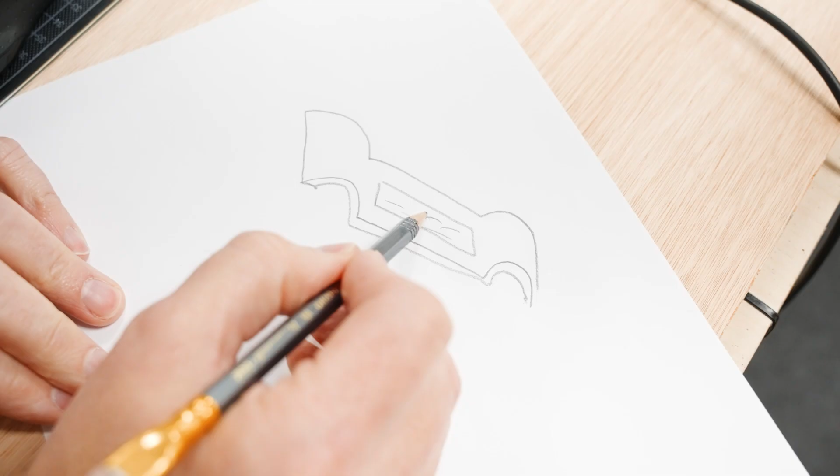So after I had that idea in my head, I thought, well, let me just sketch this out, so you get a good sense of what I would like this to look like. First of all, it would be an angle like this with a bit of a handle on it, then the tray, and then the other handle on the other end like this. A space in the center for some texture, and then maybe some text along that as well. That seemed pretty achievable with the molding toolpath.

So I have an instance of VCarve Desktop here with a job already set up, and we'll just sort of review that job setup. So it's a double-sided job, like I had talked about.

This width and height and thickness is about what I think we're gonna need for a decent size serving tray, and the thickness is about what I think we're gonna need in order to create some decent, useful handles on this. So that's where those numbers came from, again, just off the top of my head at the moment.

When it comes to our zero position, what we're gonna do is, when I do the first side, I'm gonna be zeroing off the top of my material. Then when I flip it over, I'm gonna zero my Z off of the bed of my machine, or my spoil board. I think for this job that will actually help me out a little bit, but you can set this up as you like depending on how you're going to cut yours.

The datum, as we said, the bottom left, we're going to flip bottom to top, which I like to do. It makes it easier for me to remember. I always flip bottom to top unless there's some reason why I can't. So I go with that.

Modeling resolution, we won't be creating any 3D content here, it's going to be all based on the molding toolpath. So there won't be any 3D content, but in my case, my computer can handle a very high modeling resolution, so I go ahead and use that anyway, and we'll click OK.

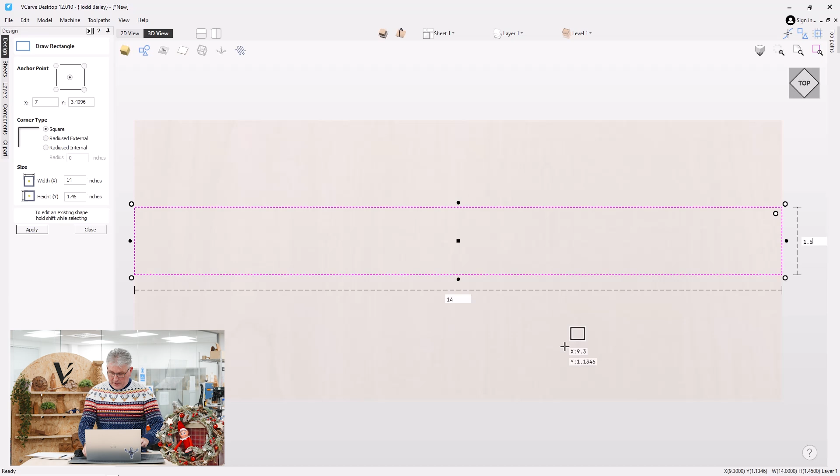To start off with this, we're going to sort of visualize the edge of our piece of material. So I'm going to draw a rectangle, and I can do that in the 3D view. That's going to stretch across the middle of my job from one side to the other. It's 14 inches, as you see here. I can press tab on my keyboard and change the thickness to be 1.5, and then press enter.

So that's the thickness I think the edge of this board is going to be. Now I can use this to draw the cross section, or the edge of my serving tray that I want to do. In this case, I'm just going to draw the top and the bottom profile of the two molding toolpaths I'm going to use to create this.

So let's draw a circle to start with. We'll just draw a circle here somewhere. That looks pretty good. We'll close that down, and we're just going to drag it and snap it to the side, and then we'll snap it to the top of our shape here. That looks good.

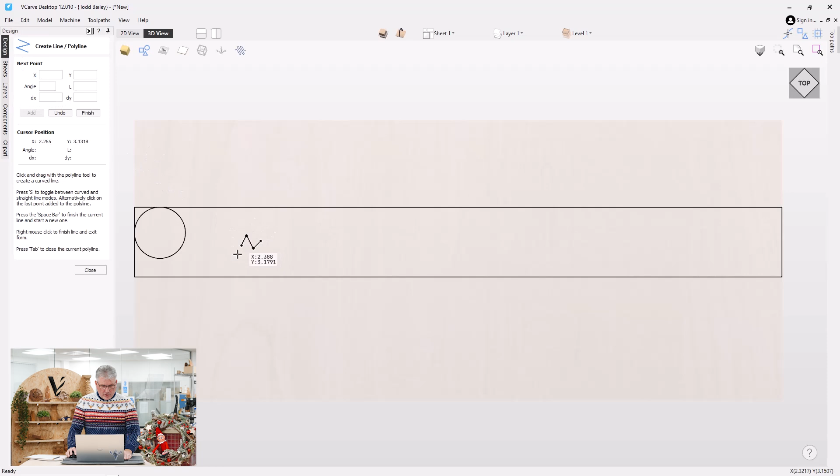And then we can just draw in a line across here that'll indicate the top of the flat area of my serving tray. Press escape. Now let's tile our views, and we'll zoom in to remove some of the parts of this circle.

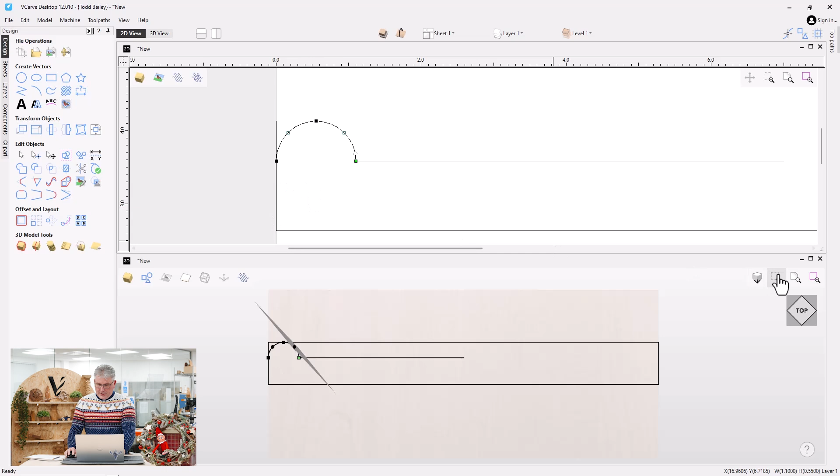In node mode, I'm just hovering over these curves, these arcs. I can press D and D, and now I have the part that I need left over. I'll maximize that so we can see it better. That looks pretty good. We'll select these two vectors, right click, and join those together, then move the endpoint so that finishes up there.

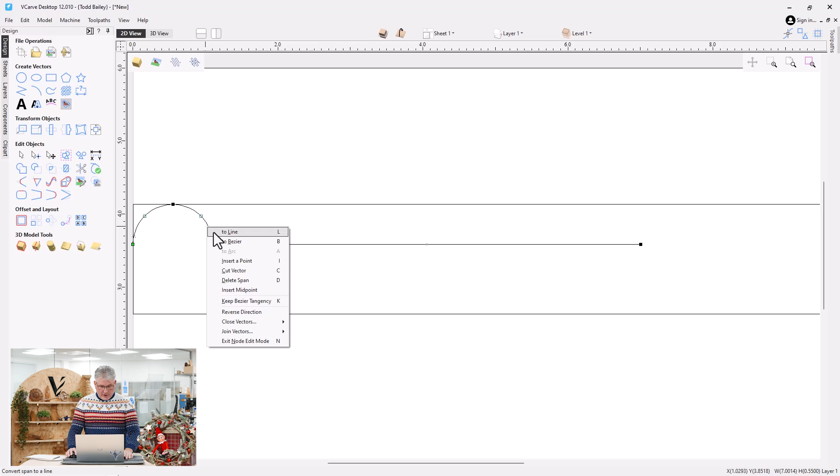Let's go into node mode. Now this is an arc right now, and I'd like to turn this into a Bezier, because that way I can shape this a bit better. So let's right click on that and say to Bezier. I can grab this one little node, and using my cursor keys pull it out a length that I like. I'd like less of a sharp point at the bottom, so I can grab that control handle and move it down a bit to somewhere that looks okay. Yeah, that looks all right.

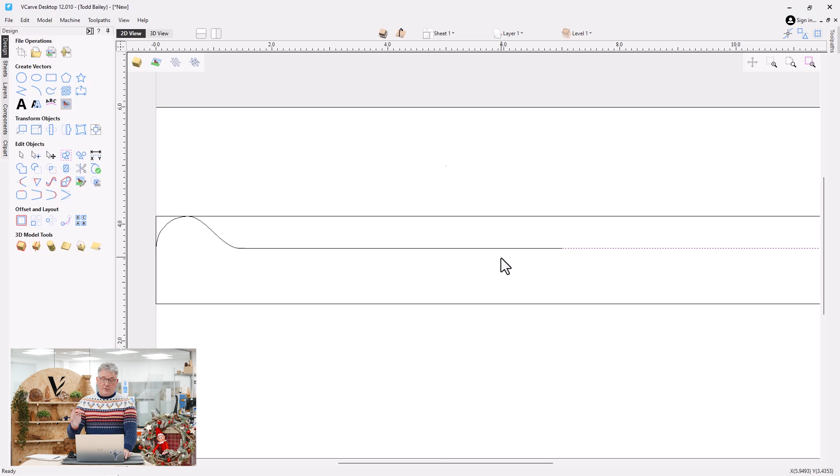Now we'll take this half of my surface of my serving tray, and hold down Control, Shift, and H. Control means copy, Shift means across one of our planes, and H is horizontally. So we're copying it across the horizontal plane of our job, and you'll see that's what happened here. If I zoom out a bit, you'll see that it's actually the right end.

Hold down my Shift key or right click, and we'll say Join, and move our endpoints. And there we have the first bit of our tray. That looks pretty good. What I'd like to do though is make this a little bit more scoopy looking at the end.

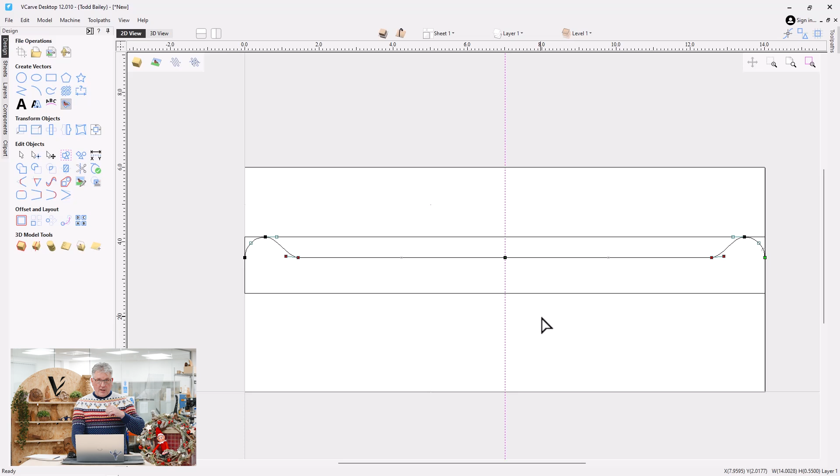So let's go into node mode, and if I press H on my keyboard, you'll see I have this line down the middle. If I select this set of control points and node, and also select this one, I can mirror the movement. So I'm moving the nodes on my left-hand side, and if I do that, you'll see they're mirroring to the right. And there we go, I like that shape much better.

That looks great. The next thing I need to do is create the profile for the bottom of this serving tray. So to do that, I'm going to go to my offset tool. The way an offset tool works along a single vector is pretend you're driving your car down the vector. If I want to offset it towards the left, I choose inward and left. If I want to go up or to the right, I'd choose the other option.

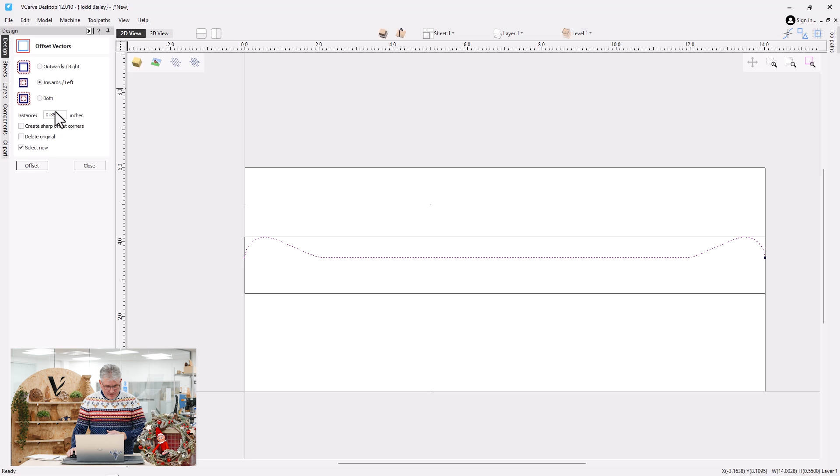Let's make this maybe a little bit more than this, let's make it 0.5 of an inch. Okay, we'll go inwards, we'll offset that. That looks okay, you'll see I got sort of a handle going here. Let's undo that and just make sure we get a decent shape. So let's put it back to 0.35 again, and we'll offset that. There we go, that looks a little bit better.

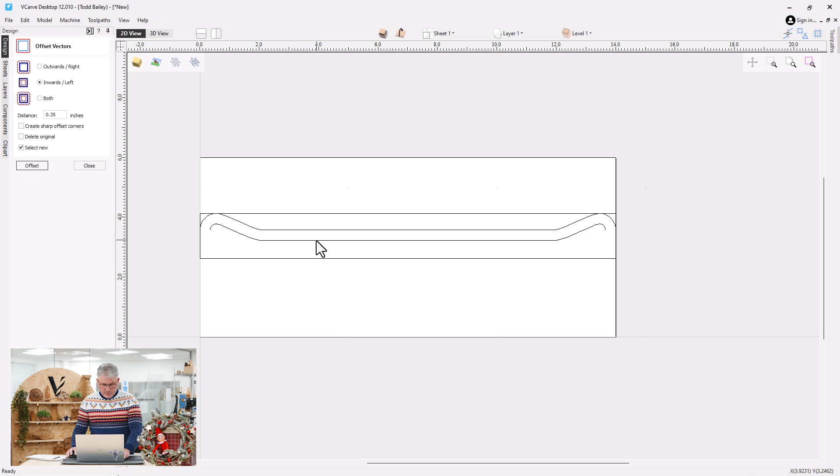Great. Now what we're going to do is leave it there where it is. We just need to make sure that—actually, no, we're going to grab these two vectors and stretch them. Just for the sake of showing you how this works, I'm going to make it look a little funny.

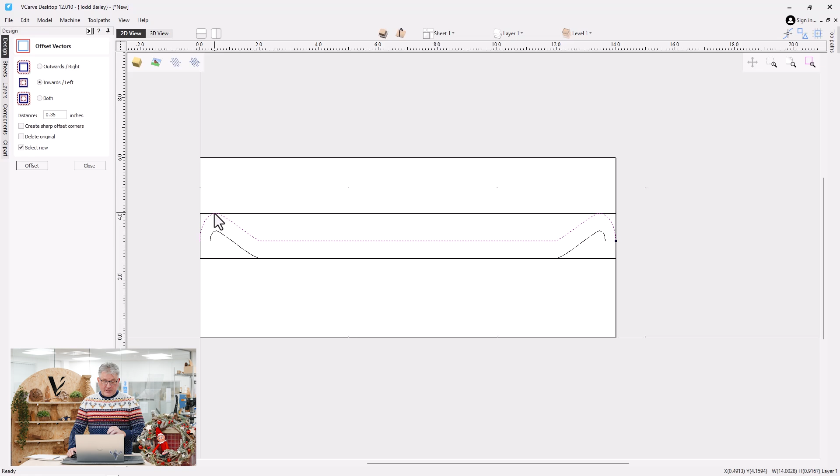That's because when we do our molding toolpath, it takes into consideration the topmost point of your vector. So this vector here on the top side will actually be at the very top of our material. When we flip it over, this will be at the very top of our material. You'll see in my final design that this looks a little bit different, but this is kind of the idea. The fact that it's a little bit thicker here in the middle doesn't matter for this demonstration.

This is solely just to show you how this works. So let's close this down and select those, and we'll move this up here out of the way. That looks great.

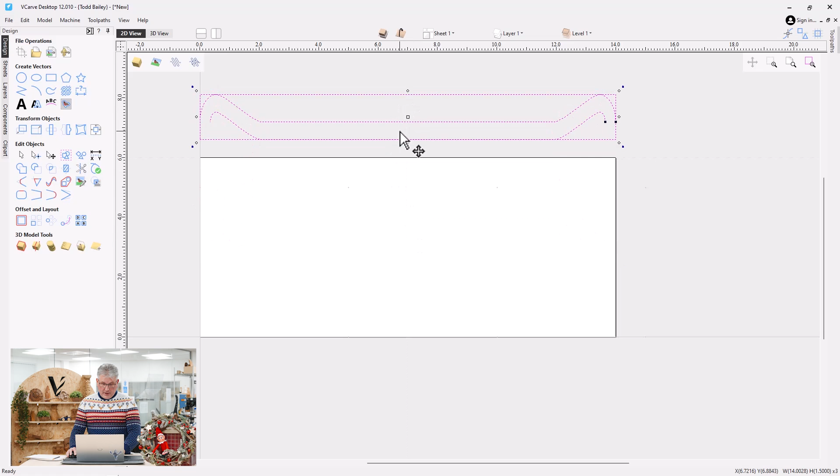Now we're going to need a couple drive rails, one for this upper vector and one for the bottom vector. The upper vector is really easy, we just need to go ahead and draw in a line from the top to the bottom.

Press escape. Now the next one we're going to need to use a guideline for, just to make our life a bit easier. Just go into our pick tool and we'll grab a guideline. We'll draw another line here and pop it down to there, and press escape.

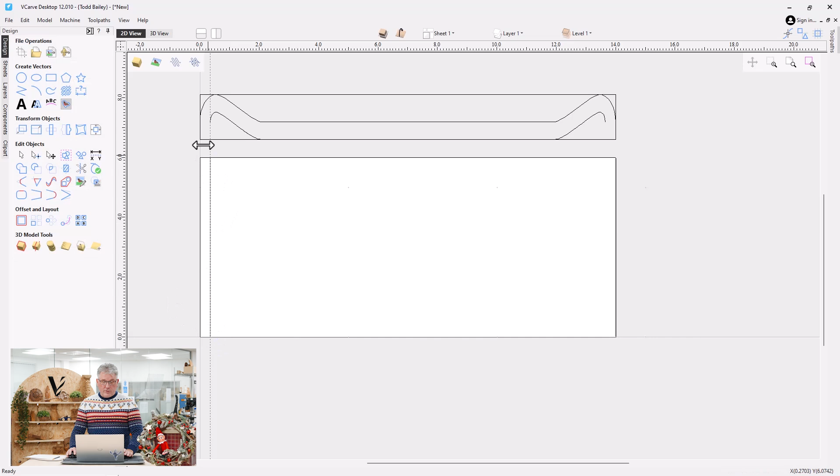And now we have two vectors, so we have two drive rails and two cross sections. Now to make our life a bit easier, I'm going to select this cross section and that drive rail, and we'll right click.

Oh, that's because I'm hovering over top of my guideline. If I right click on the actual vector, then I can move that to the other side so it's not on this side. Now let's go ahead and look at the actual molding toolpath.

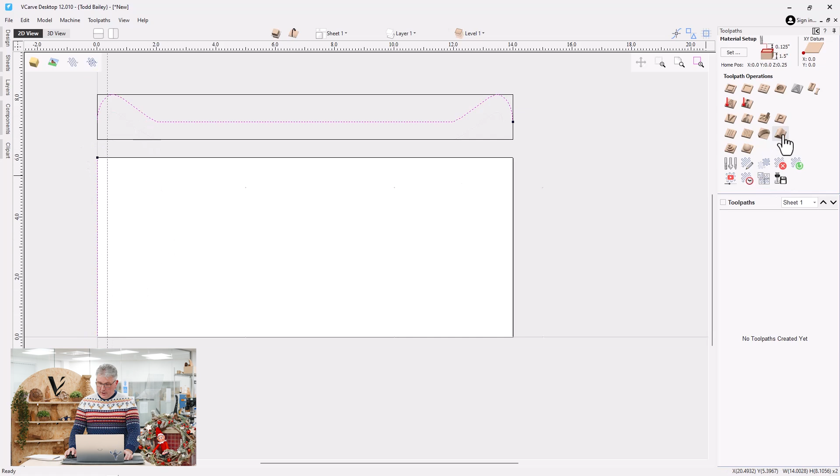So let's jump over here. To use the molding toolpath, first I need to select a drive rail and then also a cross section. If you want to know more about the molding toolpath, I highly suggest you watch our video on how to use the molding toolpath, where we'll get into all of this stuff really in depth.

So if I confuse you a little bit here or you get lost, that's okay, because we've got a great video to support this. As you can see, the actual toolpath is going to be at the top of my material, which makes a lot of sense.

I'm going to use a ball nose to do my finishing toolpath with. It's going to give a nice finish to the top of this. I'm going to vary my step over, so that as the molding toolpath goes up and down different curves, it's going to be nice and smooth because it's going to vary that step over.

I'm going to skip the flat regions with this ball nose because I'm going to go ahead and use my clearance tool to get rid of that material that's in the flat areas, since it's a flat bit on that, so I can go ahead and use that to do that work with.

And you can see I've got machine flat regions here. I'm going to leave a little bit of material behind in the areas that the ball nose is going to get to, so that it has some material to remove, and that's going to be 0.1 of an inch. It's a lot like our finishing toolpath when you do a 3D toolpath.

And that all looks great. We're going to use automatic boundary offset, which means it's going to extend the vectors out to the left and the right of that cross section just a little bit, whatever it thinks is correct, so that we get right to the bottom of those shapes.

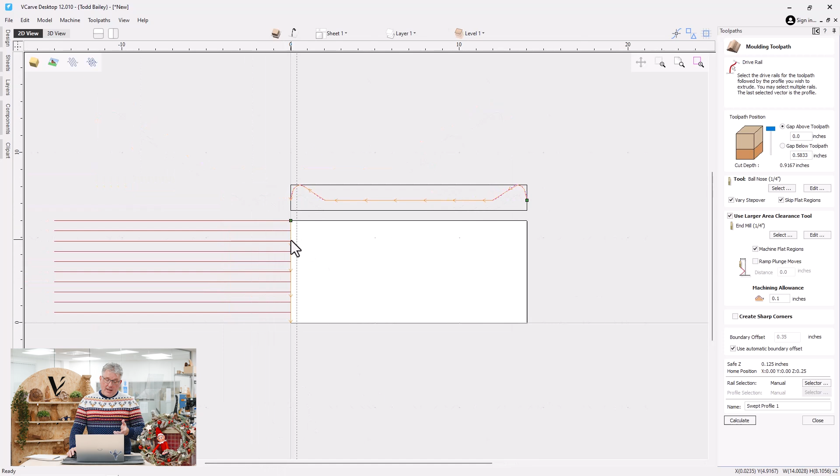And that's all set up perfectly, except if you take a look in the actual 2D view here, you're going to see that right now we're going to be creating the molding toolpath off the wrong side of this drive rail. So if I right click on that drive rail, I can reverse the direction and it will flip over into my job where it belongs.

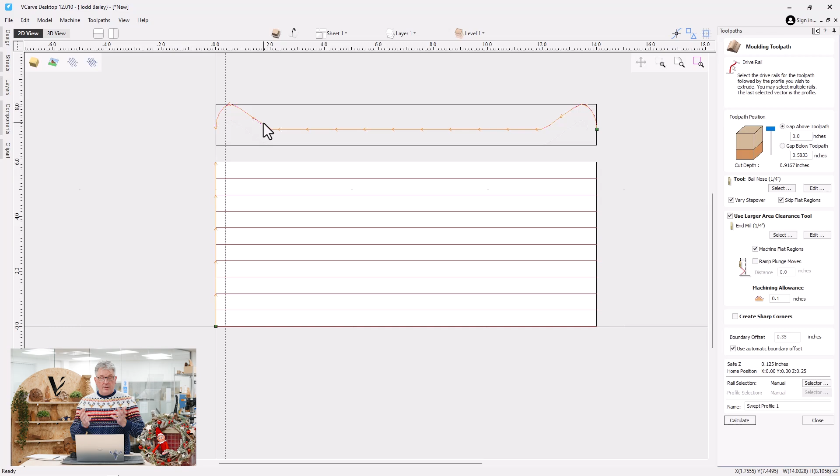Now with the molding toolpath, what we're going to do is run our tool up and down here based on this profile, which is going to give us a really fast toolpath to cut without having to do any 3D modeling. So let's calculate that.

And we'll quickly go ahead and preview that. You'll see what we're going to get here. That looks really good. So let's preview that visible toolpath.

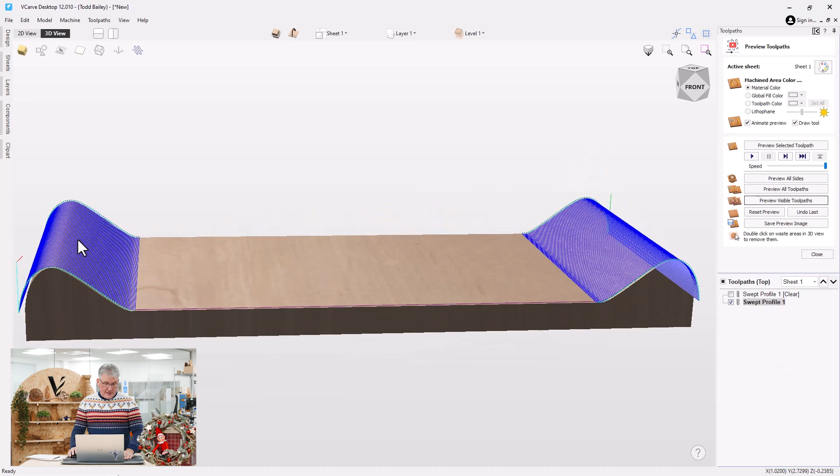And you'll see that there we're going in and clearing out all that extra material that we don't want, along with cutting that flat area on the top of my tray right down. And you'll see that the finishing or the sweep profile will actually go in and clean up these edges here and give us a nice smooth finish.

So that looks really good there. Let's pop over to the other side and do exactly the same. We'll go back to our 2D view, select this drive rail, hold down shift, and grab this cross section. Like I mentioned before, the molding toolpath will take the highest point on this vector and have it at the surface of our material, so that's exactly what I want to have happen here.

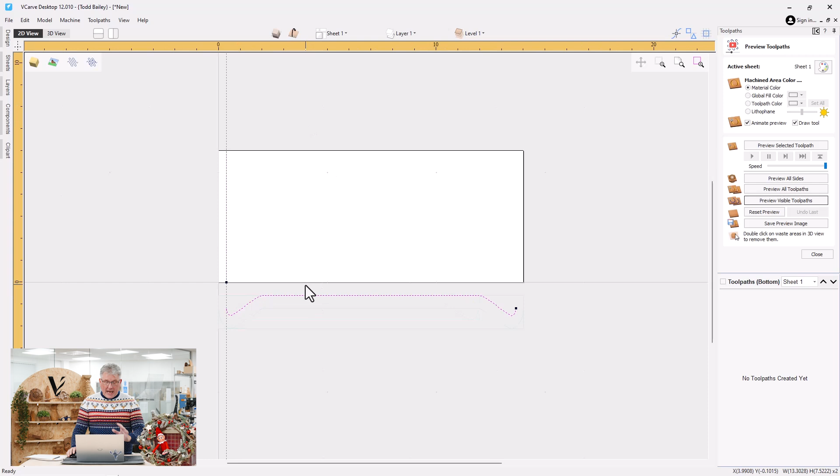Close this down, we'll create another molding toolpath. All the settings are going to be exactly the same, nothing's going to change, and we'll calculate that. Then we can preview that visible toolpath and have a look at what we get in the end. And that's what we're going to have, which is exactly right.

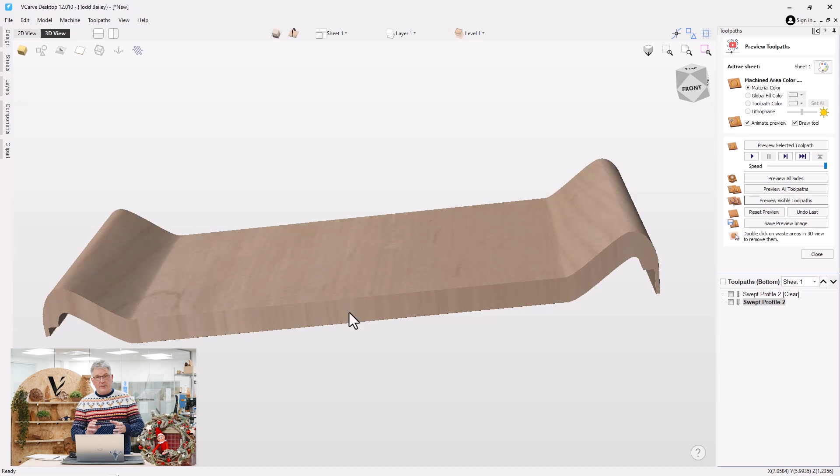Don't worry about these end bits, we can get rid of those later. But you'll see that the whole theory behind using the molding toolpath on a two-sided part to create a tray does work out exactly as you see it here.

Now let's go ahead and take a look at the finished file that I'm going to use to go ahead and cut this serving tray with. Okay, I've gone ahead now and opened up the file, and we're looking at one of the sheets. Now this file contains actually 3 different sheets.

So let's just take a second and look at the vectors at the top here, and they're the ones that are going to help me explain how I'm going to make a blank up for this job. Now I looked around the labs and I didn't have a piece of material that I thought was going to be thick enough for this project.

So what I decided to do was use these 2 pieces of material here. I've got a piece of maple here, and I can use this for the actual tray part of the job. Then I've got this other material, which I'm not quite sure what kind of wood that is. It's quite red looking, but I could use this to make 2 sort of raised handle areas that I could then carve away to shape to make a nice looking tray.

So that's sort of what you see at the top here. We've got this bottom rectangle here, which is that piece of maple, and then we have these 2 end bits here that would be the red material sort of pocketed into the maple. I thought that might give it a nice smooth look once I was done kind of shaping it.

Now when I was showing this project off to Rebecca to see what she thought, she was a little concerned that maybe just gluing these into the pockets wasn't going to be enough support to hold this together. So using some dowels might be a nice option, so I went down that road and we inserted in some dowels here.

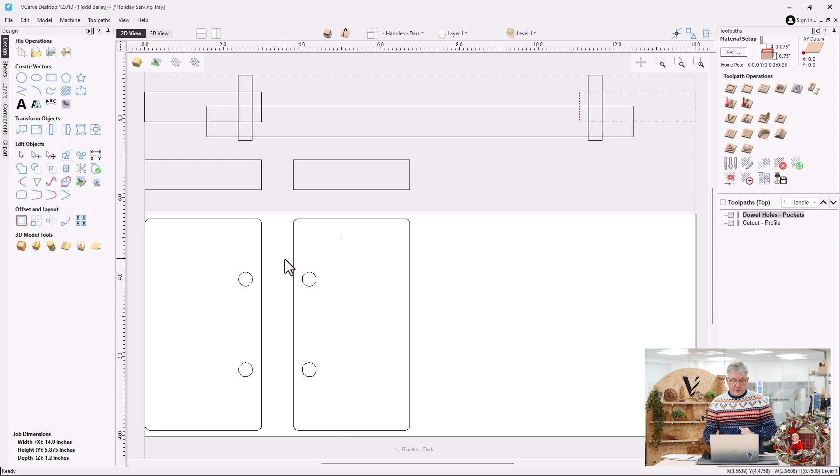And I'm going to pocket down this distance right here. So when I go to do that, I just use the measuring tool, and I can go ahead and measure the distance between that point there and this point down there. And it tells me that it's about 0.375 of an inch. So that's how deep I'm going to go down in my pocket.

Now, when I'm all done creating this blank, it's going to be important that I measure it, because this may not be accurate to what it actually cuts like on the CNC machine.

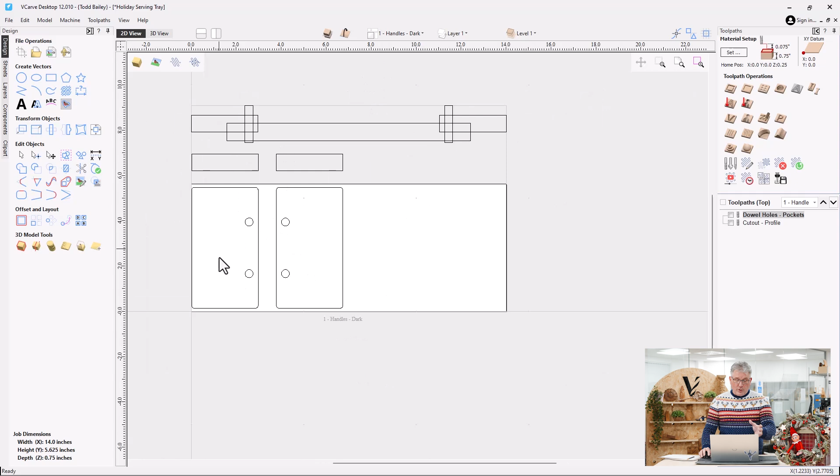So once I have those handles cut, I can go ahead now and think about what to do about the actual pockets. So I've got another sheet here, and this sheet shows where the pockets are going to be on the maple piece. And if you look at my tooling over here, see that I got the pockets.

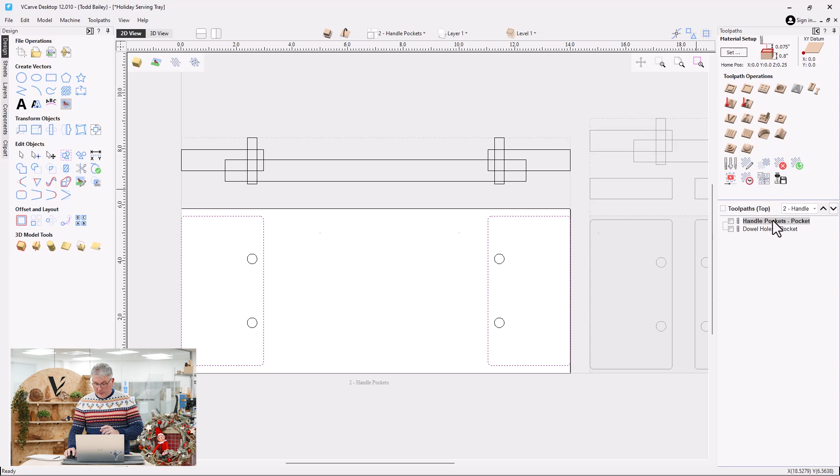And they're going to go down 0.3987, which is a little bit more accurate measurement than what I did there just quickly. And that way I can glue in. One thing I do want to point out about those pockets is that I used a pocket allowance, that way I can be sure that the handles would fit nicely into those pockets and me not have to hammer them in.

Now, I was a little bit unsure of how I was going to glue those in and clamp them in place.

So we'll kind of see how that worked out in the end. Now that I have all that done, I can go over and cut that on the CNC machine. Full disclosure, because there needed to be a glue up here and there's going to be some wet glue, I've already done this part of the job already. So let's take a look at how it cut on the CNC machine.

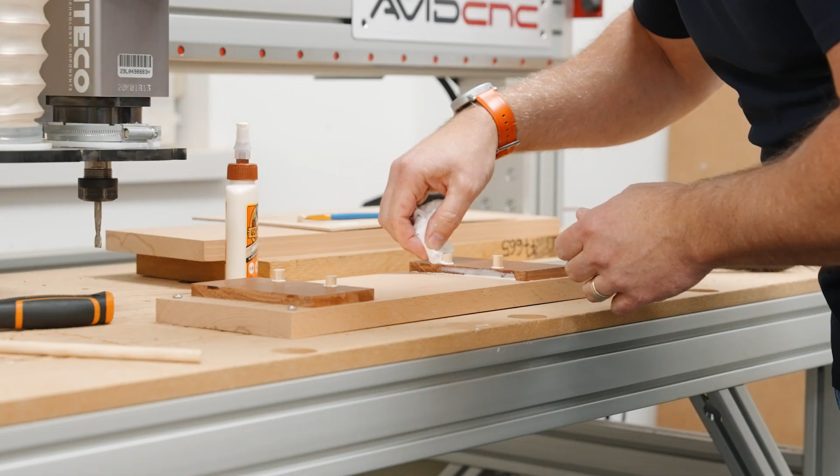Okay, now that you've seen how I've done all of that work, I need to go over today and cut off the tops of those dowels because they're sticking out quite proud from the handle of the material. So I've got this flush saw. We're just going to go ahead and cut those off right now.

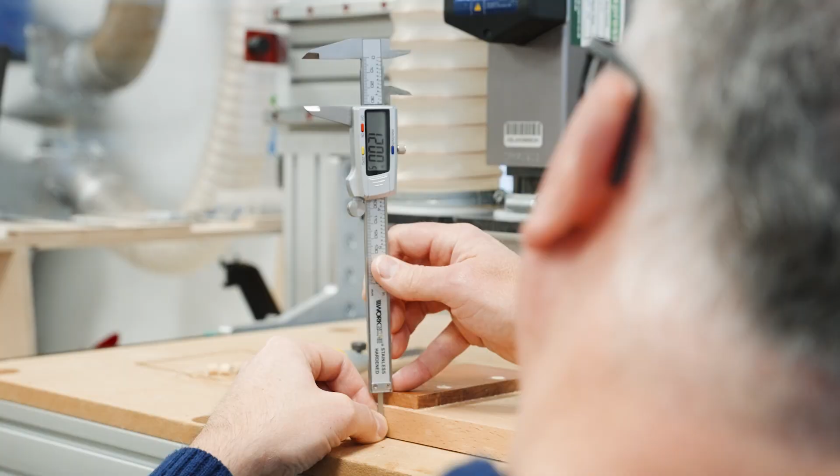Okay, now that those are cut off, I can now get a measurement of the proper thickness of my material that we're going to use on the final sheet in our actual project. So I'm going to use the calipers to do that with, and we're just going to get a rough measurement, something that's pretty close, I hope. Okay, perfect. Got that? Now let's go ahead and look at that file.

Okay, now that we know the thickness of that blank, we can go ahead and modify the final sheet to make sure that the material thickness is correct. So if I go up to my sheets here for a second and show the tray sheet, and we'll zoom out and have a look at that. We're gonna take a look at, and close down that toolpath.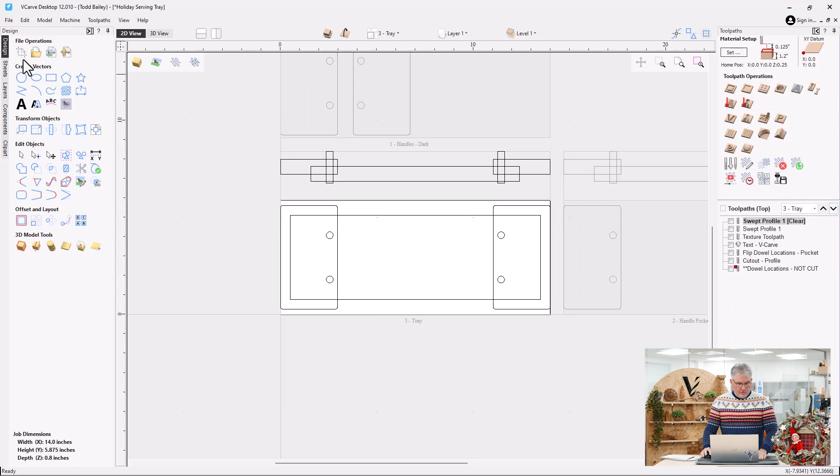We're gonna go over to our job setup and make sure the thickness of that material for that sheet is correct. So you just saw me click on job setup and that was wrong. I need to actually go to my sheets because this is a sheet issue. I want to make sure that this sheet, not the rest of them, is set up to be the right thickness. So let's go to our tray and go down to edit. You'll see that I've already gone ahead and changed that to be 1.2 of an inch thick.

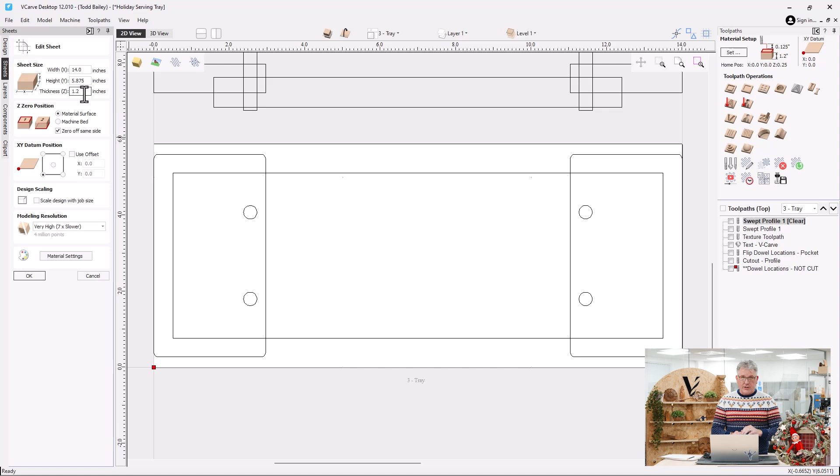So that's perfect, and we can go ahead now and look at the tooling that I'm gonna do for the rest of this job. So let's cancel out of that. Now again, we're gonna take a look at this. You'll see up top, I've left the blank drawing so that I could really be sure what was gonna happen. I've got now this rectangle here in the middle, which is the actual finished size of the tray.

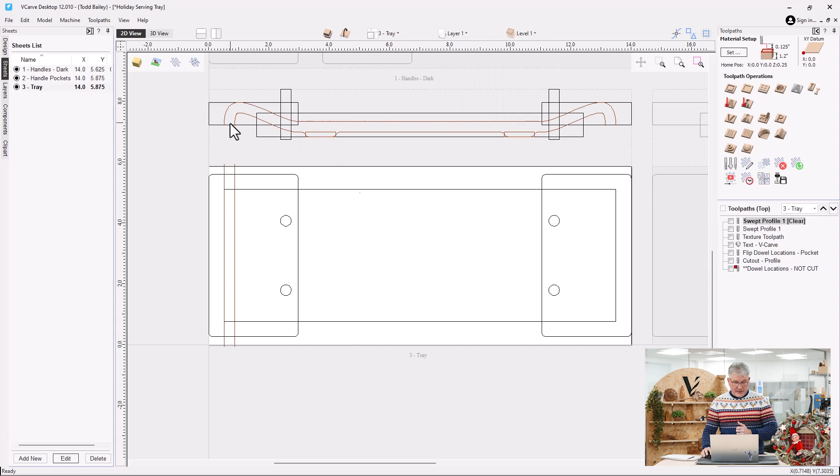Now what I want to do is design the actual molding toolpath. So here we have it right there, and you'll see that the molding toolpath fits perfectly inside of that blank. That was my idea in the end, to draw this to scale with inside this blank. So again, the top of these is going to be at the top of my material, and the bottom of the legs, the top of the legs, will be on the top of the bottom side of my material. And this distance here will be reasonably accurate.

Now, because this was drawn up before I actually knew the thickness of my blank, it's not going to be quite as accurate as it should be, but it should be pretty close. And you'll see we have our drive rails set up for our molding toolpath. So that looks really good. I'm really quite happy with that.

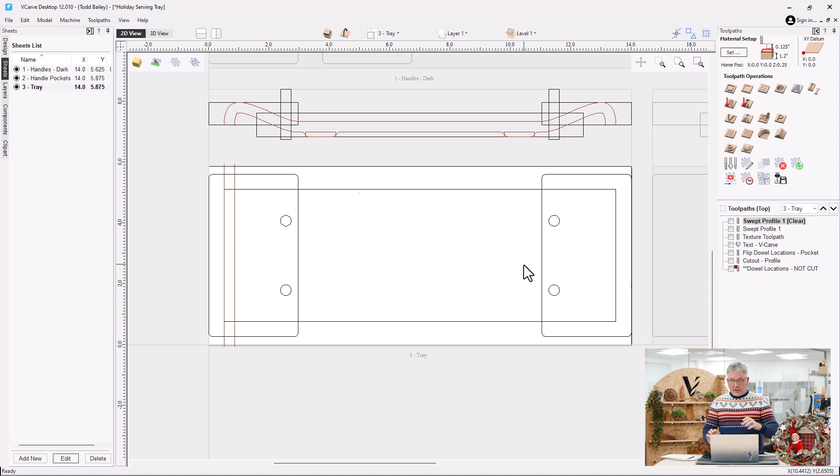The next thing I want to think about is to create a... actually, first let's just preview those toolpaths on this side to make it look great. So let's reset our preview here and preview those visible toolpaths on this side. That way we'll get an idea of how this is going to look.

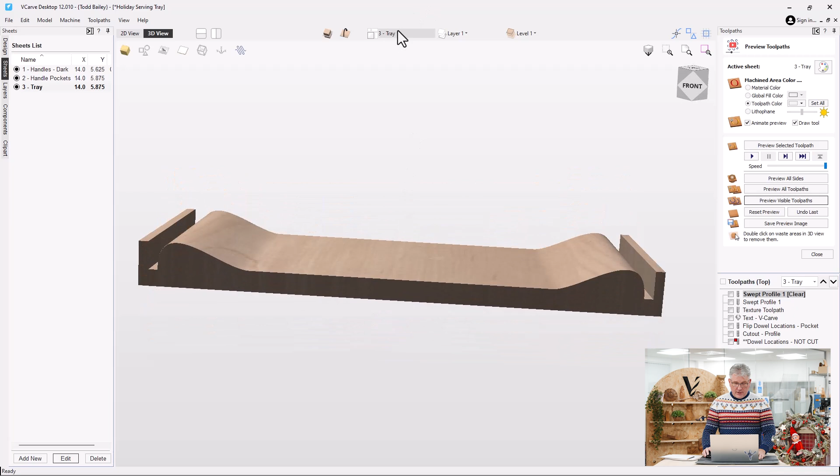Now keep in mind that the software doesn't know that I've created this blank, so it's treating it as one solid thing, which isn't the case. So we flip over to the other side and we're going to take a look at those two swept profiles. We'll preview that visible toolpath.

When we're all done with this, we'll see that we have a tray. There's no cutout pass or anything like that yet, but you'll see that we're getting the shape of our actual board here - hopefully what we'll see when we're all done cutting it.

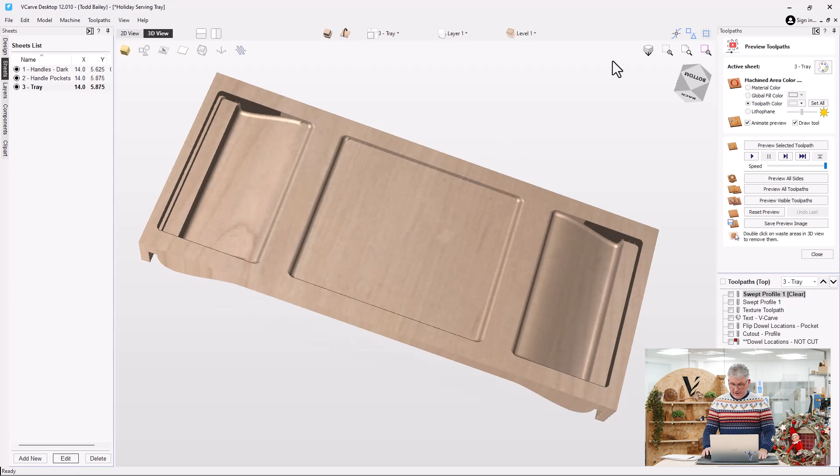So let's go back over to our other side again and look at the top of our job. Let's go back to our 2D view for a second, so we can do this in the 3D view too. We can turn on some of the other layers - we have our text layer.

So I'm going to add in some text into my job. You'll see that my text is going to be along the top and the bottom of my tray, and of course this is highly customizable text.

Right now I've got this set up for a holiday celebration - that could be Thanksgiving, it could be Christmas, it could be anything. You could also customize this maybe for a wedding, or maybe just for Thanksgiving with 'thankful' on it, or 'family' or something like that. So you can think about how you might reuse this file for all kinds of different things. That's kind of nice.

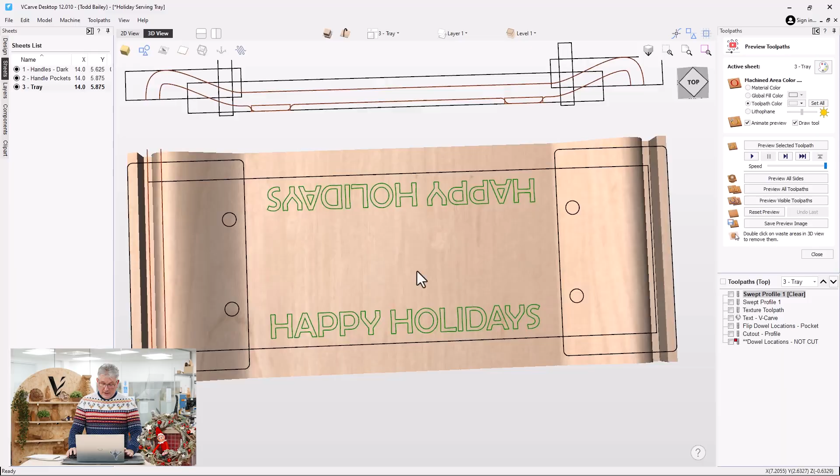That's really easy - that's just a really simple V-carve toolpath, and we can take a look at that if you'd like to. We'll just preview that toolpath, and we have a nice looking V-carving of some text there.

Now the next thing I want to show you how to do is to add in some texture. So I have this texture area that's going to be in the middle of my screen - that's the actual blue box that's here.

Now if you've never used the texture area toolpath, I really suggest you have a little bit of fun with this. I could have put texture all over this if I wanted to, or at least in the flat areas, because there isn't any 3D model - I can't project it onto a 3D model. This is the molding toolpath after all. But I certainly could have gone ahead and done any of the flat areas, maybe even ran it up a little bit onto the handle, just to kind of blend it in. But I chose just to do it in this rectangle here.

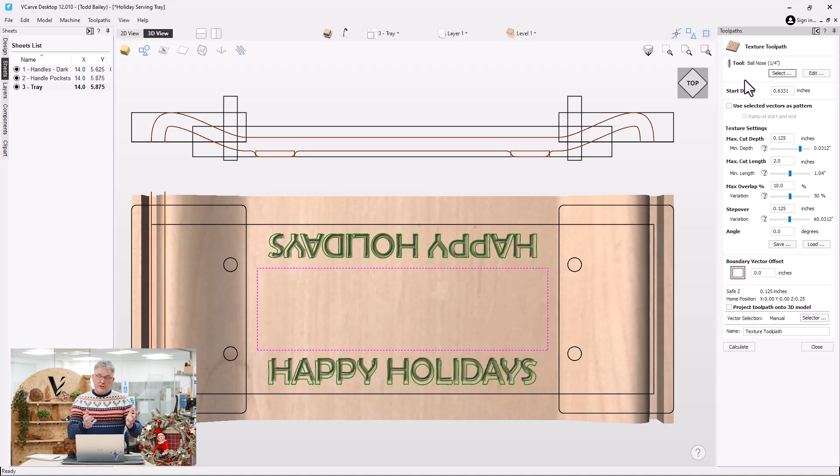So if I look at my texture area toolpath, it looks pretty daunting, but it's really not in the end. We have a great video on how to use the texture toolpath, one you might want to watch if you want to get a little bit more into this, but it is quite a useful toolpath to create textures with.

First of all, it's going to ask us for what tool we'd like to use, so I'm going to use that 1/4 inch ball nose. I'm not going to use a selected vector pattern - I'm just going to fill this rectangle with sort of a random or semi-random texture.

So I'm going to start off with my cut depth, which is going to be the max - I'm going to let it go down about 1/8 of an inch, with a little bit of randomness in there too, so it'll vary that distance just a little bit. My cut length, the maximum cut length, is going to be about 2 inches, and again I'm going to put a little bit of randomness in there so it ends up varying just slightly.

And the maximum overlap - that's going to be end to end, like the chisel marks - so end to end of those chisel marks, how much they're going to overlap, and I said about 10%. Again, we're going to add in a little bit of variation there, a little randomness to that.

The step over is the distance between the lines, just like using your tool when you're thinking about doing a roughing or finishing toolpath - that's what the step over is going to be. So I thought, you know, 1/8 of an inch might be a nice number to go with. Once you generate this, you can change these numbers as much as you like to see what happens - even play around with the size of your tool.

I just used that 1/4 inch ball nose, but if you had a big bowl cutter, then you could come up with some really great, aggressive looking carving in the bottom of this or on the surface of this tray.

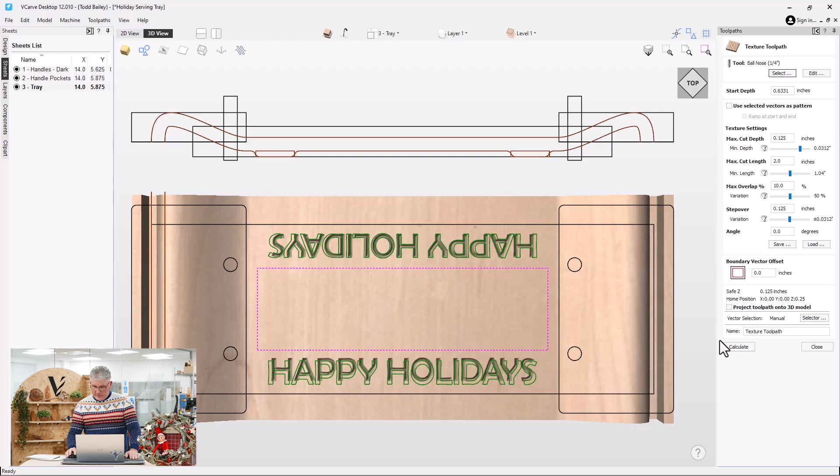That all looks great. We're not going to bother with any boundary. I've kind of designed that into my project, but if I did want to leave a little bit of a gap, I could, but we're not going to worry about that. We can just calculate that, and you'll see that there is my texture toolpath.

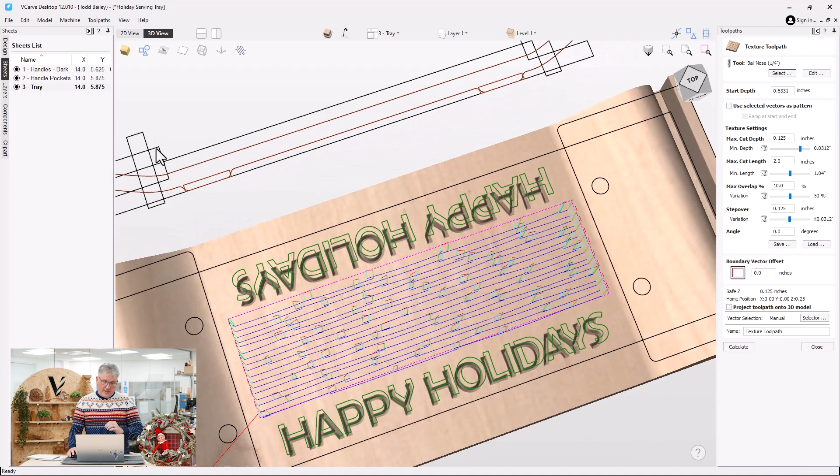Now, a couple things you want to keep in mind is that because I'm doing it at the base of this, I have the actual start depth. I knew how deep this was based on my vector that I created, because of the molding toolpath again. So all I need to do is measure from the top of this handle to the top of this vector here, and that would be my start depth.

That was important, but keep in mind that when I make these moves at the end of each of the scoopy moves, we're going to end up having to go up to our safe height that we have set. So there's going to be a little bit of Z travel in here that you can't really control. Just keep that in mind.

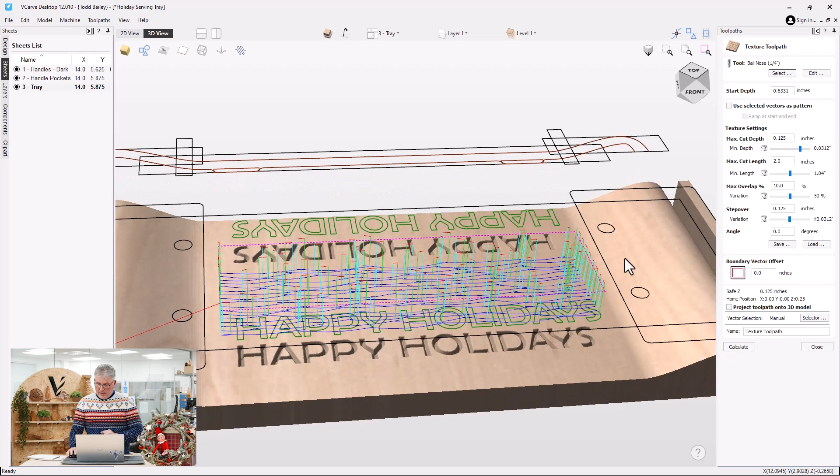So let's close that down, and we can preview that selected toolpath, and we'll take a look at that, and we'll see what we're going to end up with in the end. Yeah, that looks really quite nice. I think that's going to look good once we're all done.

So we've got the V-carving in there, and we're going to look at our cutout toolpath next. Now you notice I'm not going through these in order. That's because this is kind of the way that I felt I designed this. So the last thing I would do is worry about how to flip this.

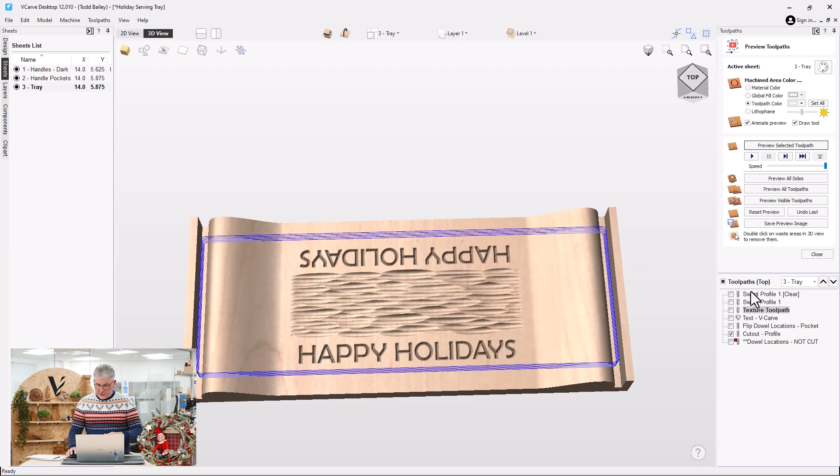So right now we're going to look at our cutout toolpath. I'm going to preview that, and you'll see what it does. It's actually going to cut just down halfway through my material, and because I can see the other side, you can kind of see that it's going to poke through the other side when I'm all done. But I think that's as far as I want to go down, because I want to add in some tabs here to make sure that it holds itself in place.

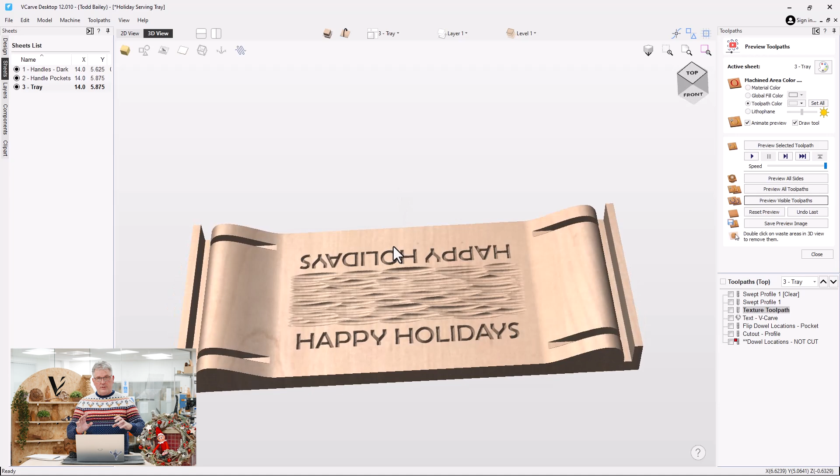I am a little bit worried about when I flip this over, because I'm only going to have the top of these ridges and the top of my material that I have left from those handles to make it flat. So I'll have to think about that once I get to the machine. But anyway, that was sort of what I was thinking - if I cut the final cutout pass on the back side, and that's where my tabs lived, things will be a little bit more tight.

So anyway, that looks really good. Now we're also going to need to use those dowel locations, right? Because we're going to do an asymmetrical dowel flip.

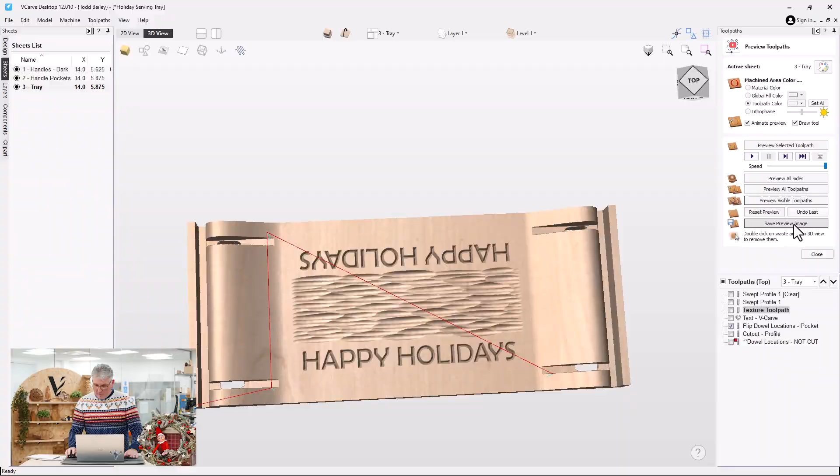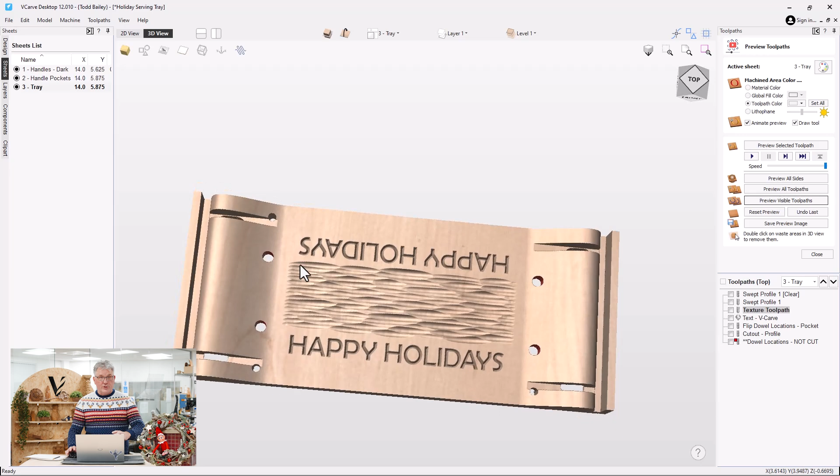But we're going to go ahead and preview those dowel holes there. Now, I do have this last toolpath here that I don't really want you to run, and you're not going to run it ever because it'll actually cut out those dowels that you've put into place. But what this will do is illustrate where those dowels are going to be - the dowels that are holding those handles in place on my finished project - and they'll fit just nicely inside of the beginning of that scoop, which should give me a little bit more support once those are glued in there to hold those handles on there. So yeah, that looks really good.

Now let's just go ahead and have a peek at the other side. We have the spoil board dowel holes.

So those are the ones I'm going to take my material off, or my blank off the machine, and I'm going to cut these right into the spoil board, then put my dowels in there, put my material back on top again, and then start to cut my backside toolpaths.

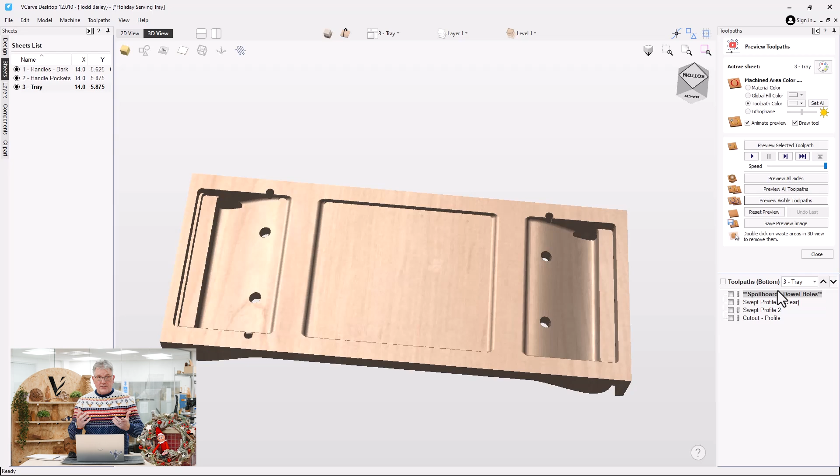But because when I set up my job, remember I said I'm going to zero my material when I flip it over off the machine bed. Be sure that you set a start depth equal to your material thickness, so the tool will travel through the invisible material that isn't there yet, then actually start cutting down 0.35 of an inch when it reaches the top of your spoil board.

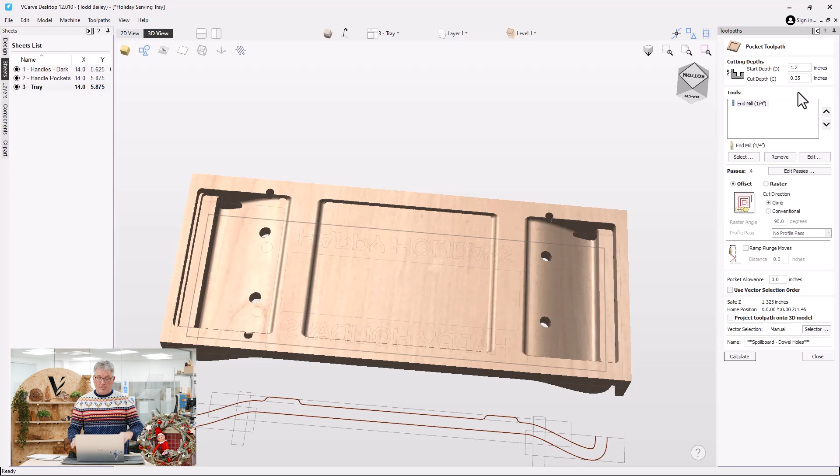We don't need to preview that toolpath because it won't show anything different from what we already have. We've got the two sweep profiles we looked at, and then this is the last cutout toolpath - you can see I've got some tabs in there. So if we preview that selected toolpath, you'll see it cut down through, and there we have the finished job.

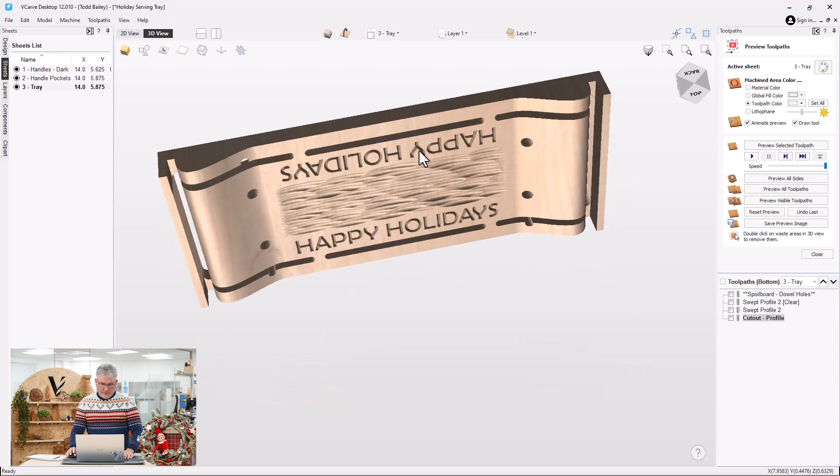Now that looks pretty nice, I think. I love the way that turned out in the preview here. Now it all comes down to how I go about doing it on the CNC machine. So let's go over there right now and cut those toolpaths.

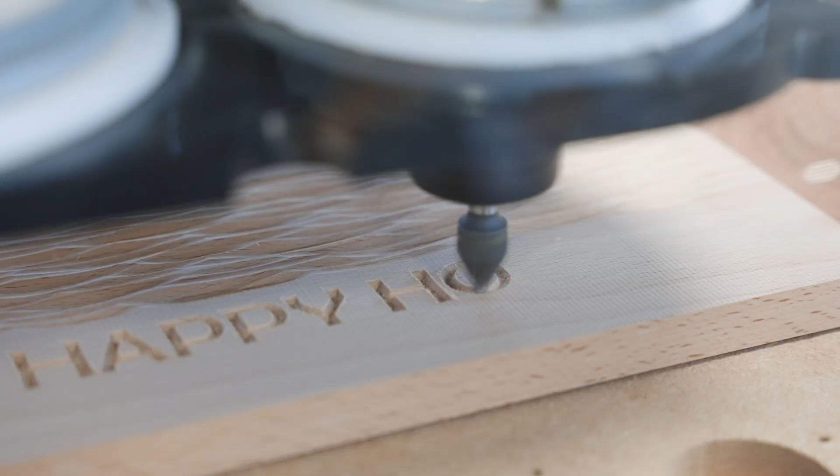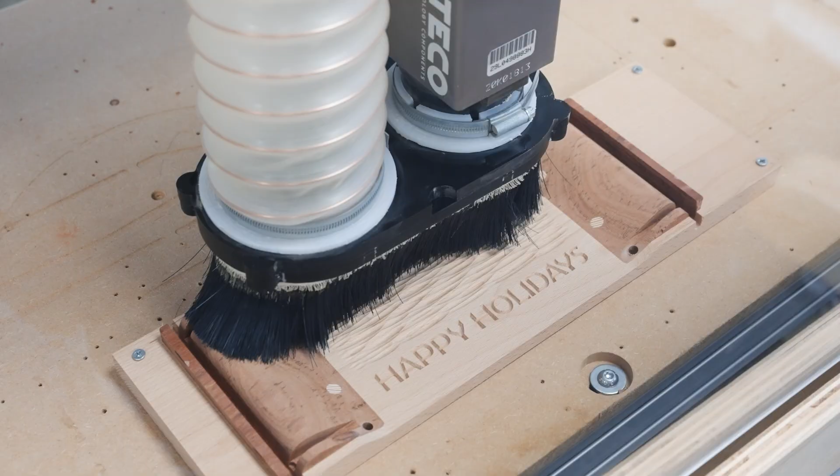So that's the first side done. Now we need to think about the second side. I knew this was going to be a potential issue, because when I flip it over, there's really nothing to support this side at all, except for these little legs right here. So what I've decided to do was cut these little blanks out of some plywood we had kicking around, which happens to be, just by fluke, the exact depth, so I can use that to help support this piece of material.

Now I'm not going to worry about the center. I'm going to leave it just as it is.

I'm happy with that. Now the next thing I need to think about is, because I'll be zeroing my tool off the machine bed this time around, I need to make sure that in my toolpath I set my start depth for the toolpath I'm using to cut the dowel holes into my spoil board at a start depth of the material thickness, which in this case is 1.2 inches. That way, since this material won't actually be there, it'll think it is, so we need to cut through that air where the material is supposed to be.

So we're going to go ahead now and cut those dowel holes, then go ahead and screw this down, and we'll start running those new toolpaths.